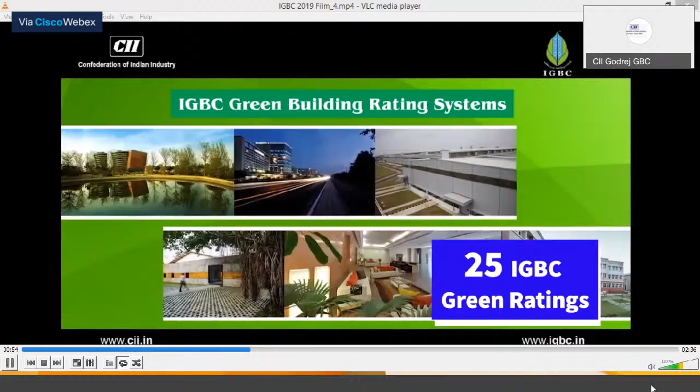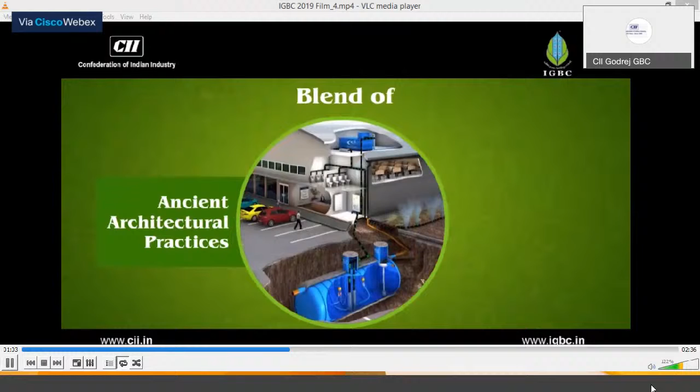IGBC, facilitating a greener and healthier India. In the year 2001, IGBC was formed by CII with a vision to enable sustainable built environment for all and facilitate India to become one of the global leaders in sustainable built environment by 2025. Thanks to the support and involvement of all stakeholders, India stands tall in the global green building map. IGBC is now successful in taking green principles to larger built environment, such as cities, townships, schools, villages, and metros. IGBC has designed green building rating systems to suit various building types. IGBC green building rating systems are a perfect blend of ancient architectural practices and modern technological trends. IGBC, with the support of all the stakeholders, has demonstrated a clear business case for green buildings. Today, constructing a green building is technically feasible and economically viable. Various building types are going the green way with IGBC. IGBC local chapters and are playing a catalytic role in the spread of the green building movement across the country. IGBC estimates that by the year 2030, the market potential for green building products, technologies, and equipment would be about USD 300 billion. To facilitate wider adoption of green building products, IGBC has launched the Green Product Certification, Green Pro. Having gained rich and varied experience in the modern green building movement, the industry is well poised to set new global benchmarks.

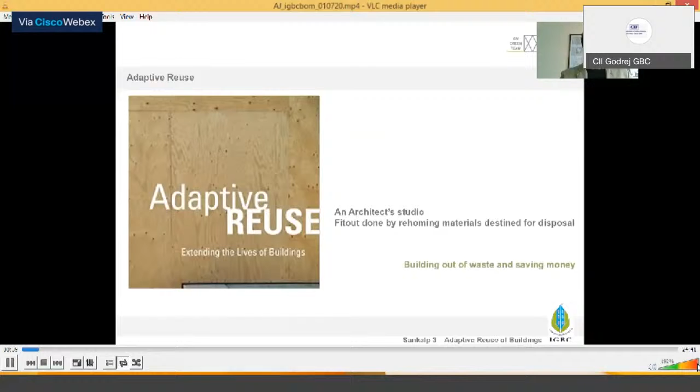For starters, the fit out that we did was done by rehoming materials which were destined for end of life or for disposal. So by building out of waste again, we saved money.

How did we choose what waste to build from? Let us have a look at this simple graph. You can see the bar in the green says 26%.

It is for 2030 energy consumption footprint of all buildings constructed between 2015 to 2030, about 900 billion square feet spanning 15 years. The balance is building materials, 74%. So building materials have a huge impact on energy consumption footprint.

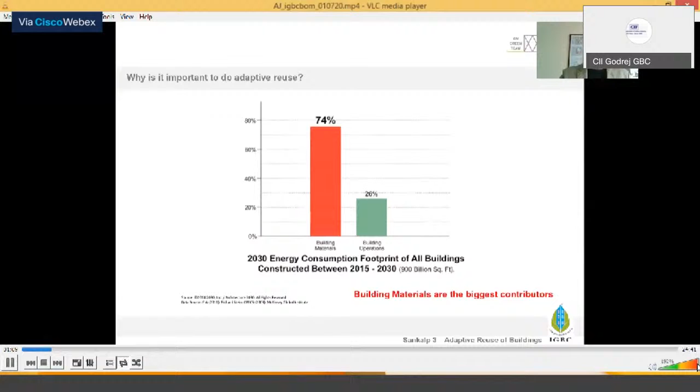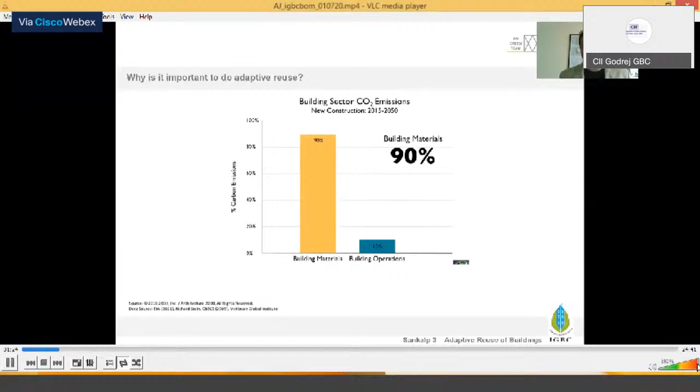Moving on to the next slide. Here again, building operations and the sector-wise carbon dioxide emissions between 2015 to 2050 is only 10% for operations and 90% by building materials. So you can imagine how big of an impact building materials have on the carbon dioxide.

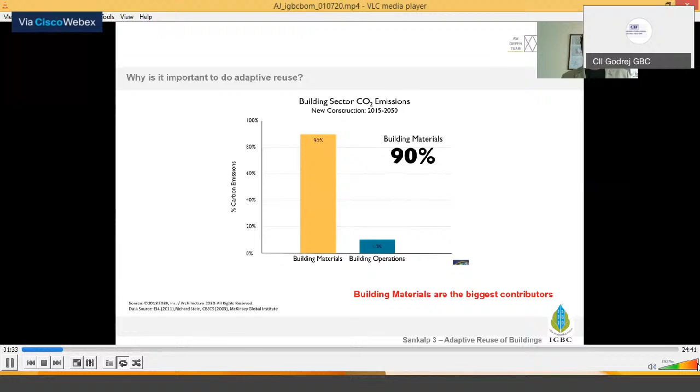Building materials and construction is about 49%, 51% is operational carbon, building operations. So this is an interesting figure, that at least 49% is still slightly less than operational carbon.

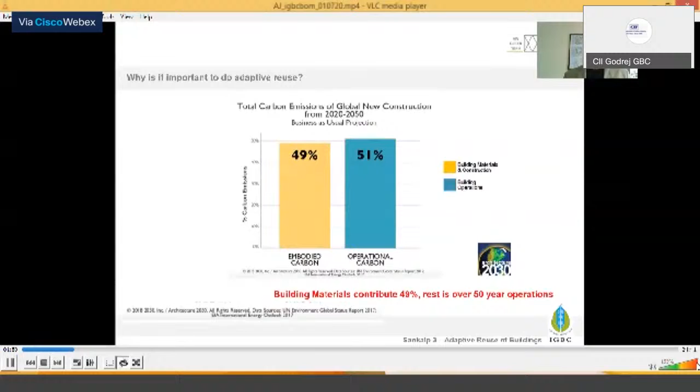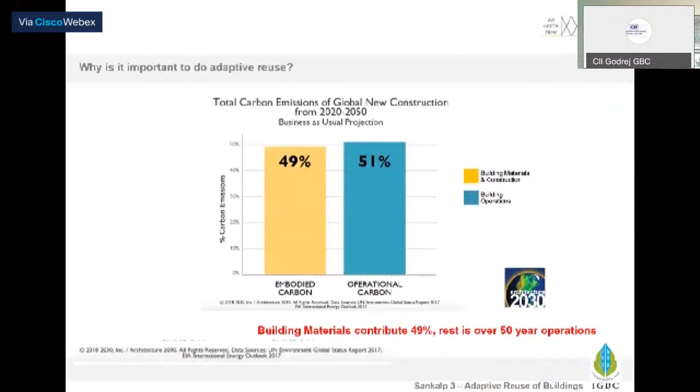What you must bear in mind here is that this 49% is set out only over a span of 1 to 3 years, right, when the material is extracted, stored, or when the building is built. The operational carbon and the building operations will span the design life of the building, 30, 40, 50 years. So when you start putting it in that context, you suddenly start seeing how much embodied carbon is really reflected in building materials and construction.

So what is this word, embodied?

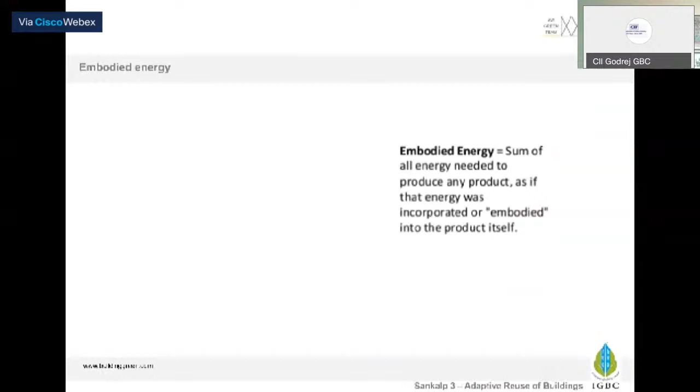Having a lower embodied energy, or choosing materials with lower embodied energy, allows you to have a lower carbon footprint on the planet.

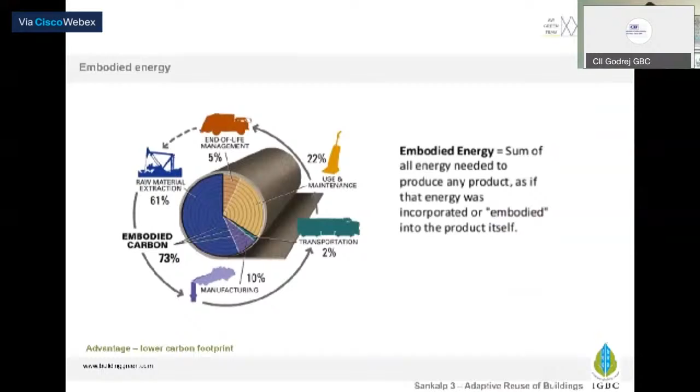So does this mean we go out chopping wood and trees? No. But it still means that wood is a more sustainable material than steel and concrete. So we did not go chopping trees and bringing wood in for our construction.

We wanted to use wood-based material. We wanted to use plywood. Compared to normal wood, when you have plywood, you have already applied chopping of the tree, processing, pulp making, manufacturing, sheet drawing. So we were worried about what the carbon footprint, the embodied energy, of this product would be. The embodied energy in this plywood is still very low compared to that of aluminum or clay or PU foam or anything else. So plywood, or plywood-based materials, were the materials of choice for us.

This is when we could see our material palette forming. At this point, when we started thinking of materials to use—plywood, veneer, which is a flitch of tree bark mounted on plywood, MDF, which again is a sustainable way of using wood, aluminum sections, some glass, some tiles, soft boards, and MS.